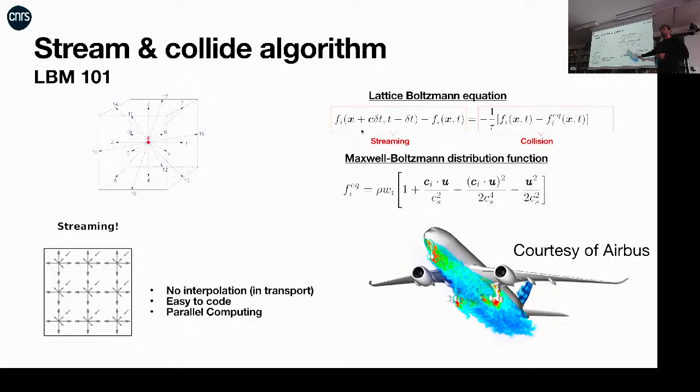So just to mention that when we write this, it looks like we're doing a first order Euler integration. So you can say that this is first order, but in reality what's hidden behind is a Crank-Nicolson scheme, so it's actually second order. The scheme is second order in space and time.

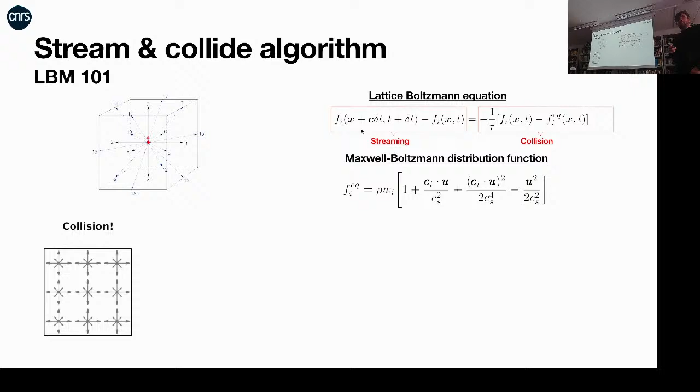Okay. So there is one problem with what I showed here, is that this works very well to solve isothermal flows, okay? And isothermal flows in which we assume P equal to rho Cs squared, so sound speed squared, okay? So this is the classical closure if you have constant temperature. But there is one problem with this framework that I'm describing, is that if we consider the energy equation, the energy equation should be order 2 here. So here should be order 3.

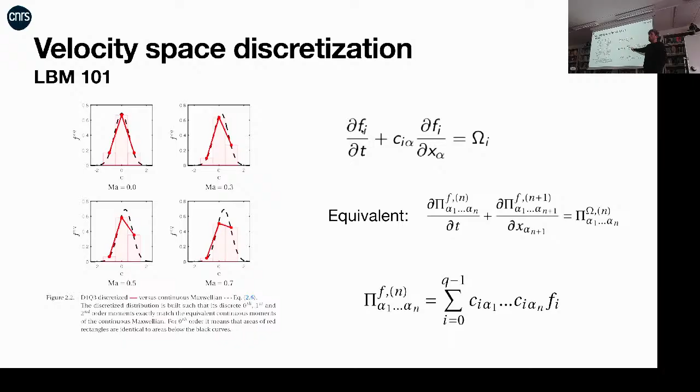And when we consider closest neighbor lattices like this, we always have plus or minus 1, basically. All of the velocities are plus minus 1 ordinates. And if you do that to the cube, you always get the same, plus or minus 1. This means that the third order, pi alpha alpha alpha, is equal to pi alpha, which means that your flux of energy is the same as the flux of mass, basically. It's linked. And so you see that you have a problem. That's why with the closest neighbor lattices, this kind of discretization, you cannot do compressible flows. You can only do weakly compressible, in the low Mach limit of isothermal flows.

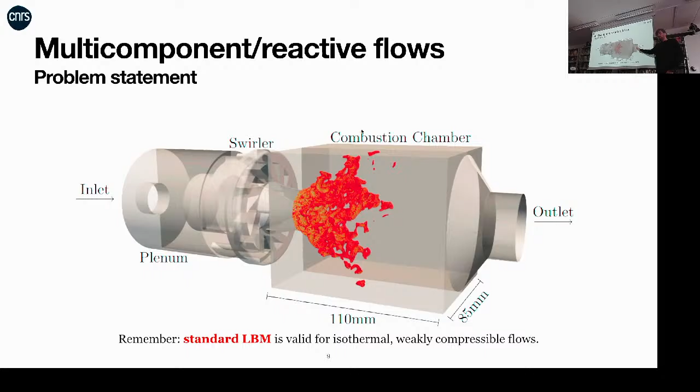Okay. So what I want to do, what I showed you on the first slide, is this. We cannot do this, obviously, with this equation. So I've shown you how to solve these two equations with the Lattice-Boltzmann method. And now we need to find a way to solve all of the other equations. And these are the classical combustion equations. So I'm not entering into detail, but basically we want arbitrary transport, arbitrary equation of state, arbitrary chemistry, arbitrary gamma, very importantly. In LBM, usually we have constant gamma, and so on.

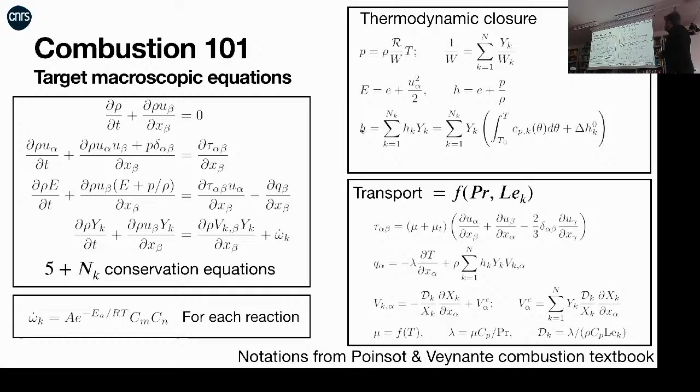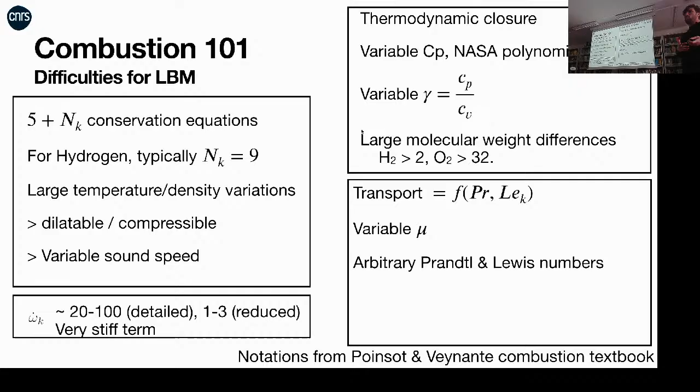So difficulties that will arise for LBM is that we have many more conservation equations. For hydrogen, for instance, we have usually 9 species. It's dilatable, compressible. And I didn't mention this, but we have variable gamma, whereas when we do the classical cascade of LBM, of the moments, we end up with a constant gamma, which is dependent on the dimension of the problem. So there are some fixes, but they're not so straightforward.

So how are we going to solve for energy and species? There are basically two main options. Here I'm going to start first with the energy equation, so the compressible part. I want to solve the compressible part, and then I'm going to deal with the species. So when we want to add the energy equation, the most straightforward way is to extend the basis of discrete velocities I discussed, to avoid having that pi alpha alpha alpha equal pi alpha.

So if we do that, we can develop what is called multi-speed Lattice-Boltzmann methods, and usually we end up with a quite large number of discrete velocities. And it has a number of problems, but especially it starts being quite expensive. So the gain that we usually have with LBM is not that clear anymore, because we're multiplying by 4 or 5 the memory that's required to do simulation, instead of 5 equations in the classical Navier-Stokes equations.

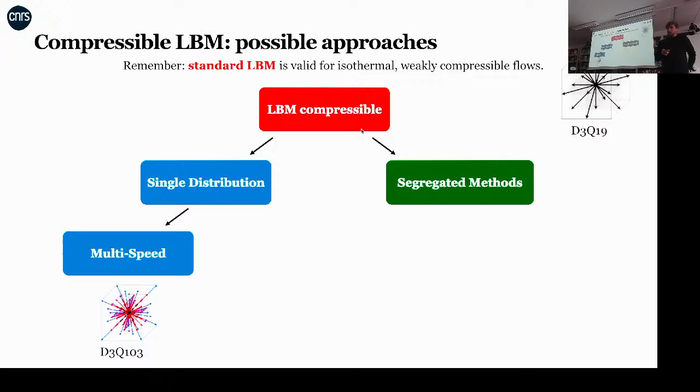Second idea is to do a segregated method. I think this was historically the first idea. People wanted to stay in the LBM framework, so they said, okay, I cannot get energy as the second order moment of my distribution function, so I'm going to introduce a new one, which is going to behave exactly in the same way as the first one. It's going to be solved with the same algorithm, but energy now is 0th order, and I'm going to couple the two, basically, okay?

This works. There are a number of papers, but it also gets quite expensive, especially if you want to consider n species, because then you need to have 19 for rho and rho u alpha, 19 for the energy, and 19 per species. It starts getting quite expensive. And when we think about it, the nice thing about LBM is that you can solve in the same equation the 0th order and first order, so mass and momentum equations.

But after the first order, what would be the next order equation for energy, at least at Navier-Stokes level, there's none. So the only thing we want from this is the 0th order. Sorry, it's the sum of all of these quantities, GIs, typically, okay? So if I just want the sum, then I can just solve for the sum, which is one scalar. So that's what I developed in my team. So this is a class of hybrid methods.

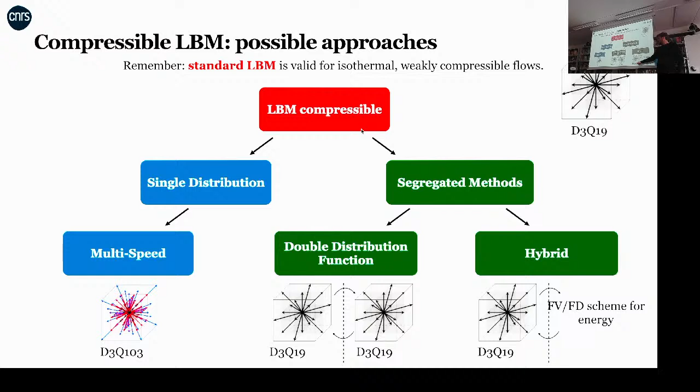And in that case, basically, we solve for 19 discrete velocities, 19 FIs, and we add to our vector of unknowns E, for instance, we're going to discuss which E, and the species. Okay, so we just add. So typically, if I want to do hydrogen combustion with 9 species, I need energy plus 9 species plus the 19, so I have 29 unknowns in total.

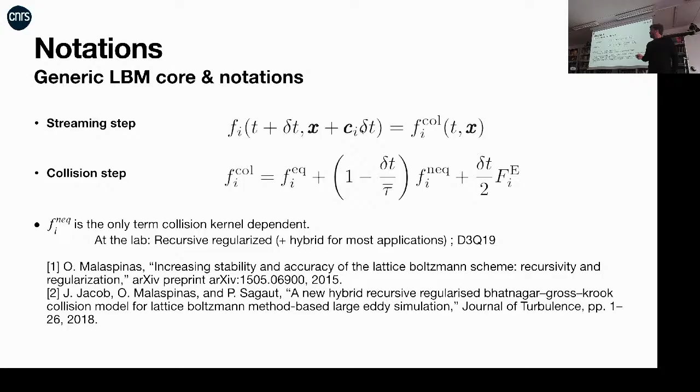Okay, so just a quick reminder of notations here. So we have a streaming step here in the LBM, which is streaming a colliding population, which can be written like this. So basically, this is an equilibrium. This is the Maxwell-Boltzmann function that we saw earlier. And this is an off-equilibrium part. This is nothing but F minus Feq. And this is if we have a forcing term. So we need to make some changes to get the dilatation right.

So the first thing that we did, the most important, is to introduce a parameter, theta, which is going to be some sort of reduced temperature, okay? So before we had P equal rho Cs squared, so theta equal 1, and now we want to have theta non-equal to 1. So this can also be seen as a ratio of sound speeds, typically. Or a ratio of temperature to a reference temperature. But this indicates this is my temperature variable, okay?

This is now projected on my polynomial, so order 0 is always rho. This is non-negotiable because this is my mass. Here order 1 is rho u alpha, and now order 2, here I used to have rho Cs squared. Now I do that times theta minus 1. So I get the right pressure into my momentum equation in the momentum flux.

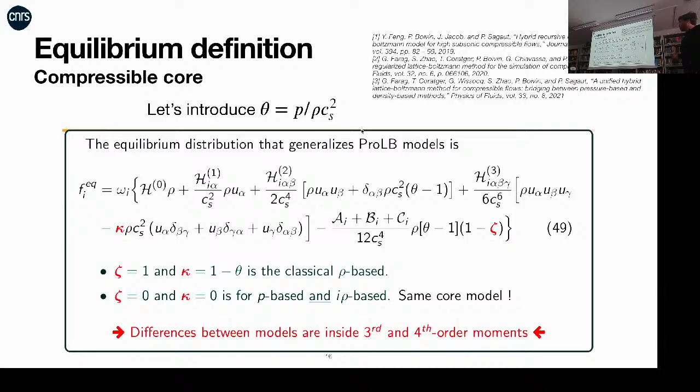And then we actually extended this to third and fourth order, okay? And I'm going to illustrate why this is important for compressible flows. So fourth order is the most important. Fourth order actually controls the isotropy of the dilatation, which we didn't have in the classical Lattice-Boltzmann method. Okay, so we showed this is a very simple test case.

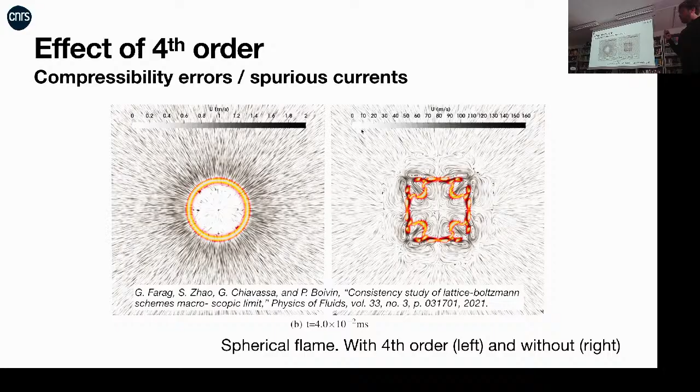So this is for the fourth order. The fourth order controls the isotropy of dilatation, again, that we didn't have in the original LBM. The third order is a bit more sensitive, but third order controls the isotropy, for instance, in a jet. Okay, so we're all talking about errors here.

I mean, every scheme, if I cut my F equilibrium to second order, I will be consistent to the Navier-Stokes equation. Okay, the problem here, what we're doing through third and fourth order, what you don't want is your error to be too different in the different directions, because after a long time, then you're in trouble. Okay, so this is what will give you spurious currents or this kind of behavior.

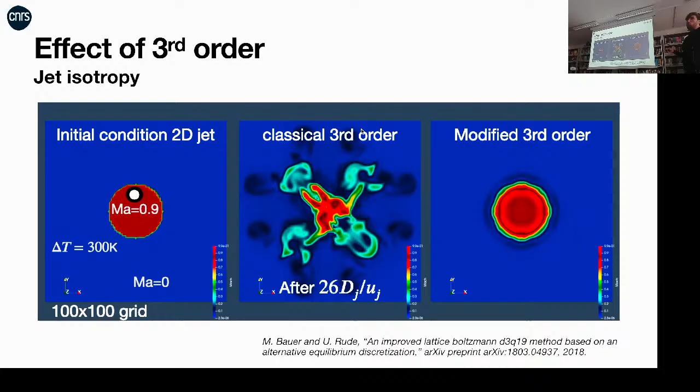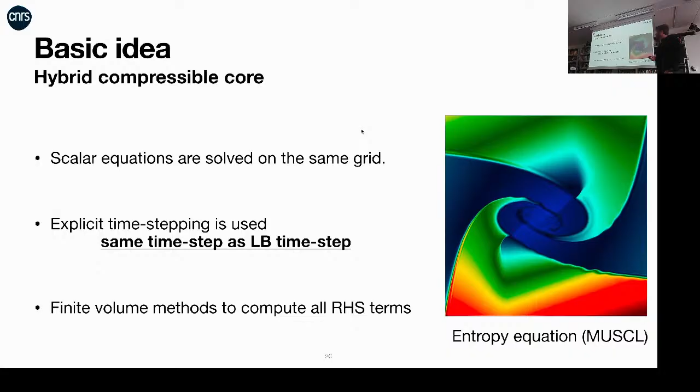So this is what we modified for the LBM part. Now I'm going to mention what we did for the species and for energy. So I'm going to accelerate a bit. Basically, what we want to do is that we know, at least I know, that LBM is very good at transporting vorticity and acoustics, especially acoustics, but vorticity on very few points also.

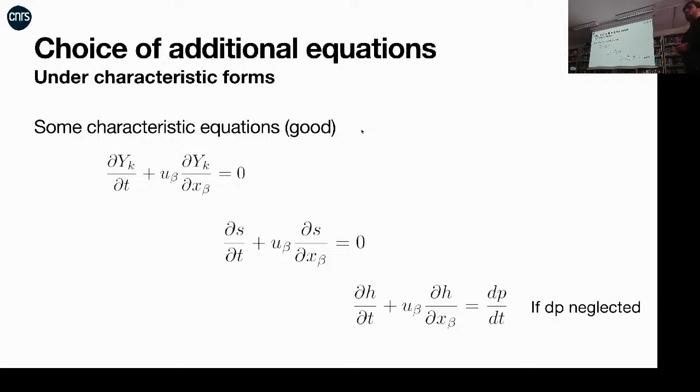Basically, when we solve this equation coupled with LBM, it's very easy because it doesn't act on the others. It's a weak coupling with the other modes, with acoustic and vorticity. So basically, it doesn't perturb the acoustic and vorticity. So to solve this, you can almost use any scheme you want. Let's say you can use a central scheme or anything you want. The best always is to use this kind of isotropic finite difference scheme, because then you're using all of your neighbors, the same as the LBM.

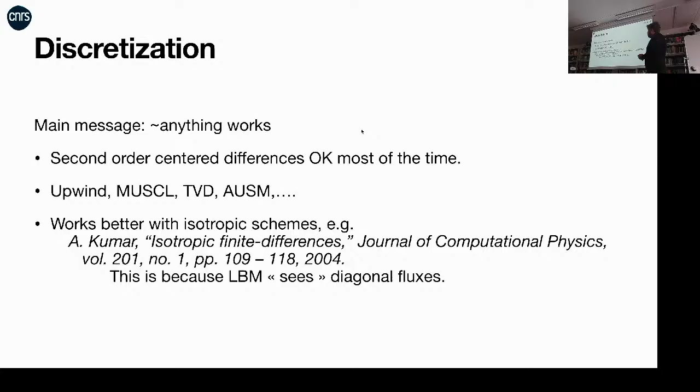Okay, so this is what we used to use at the beginning. This is very straightforward to do. As I said, it's just adding scalars. So we're solving on the same grid, same time step as LBM. So everything is mono, it's one block of code.

And then we developed new categories of schemes, also at the lab, based on early proposals here, which basically see on the lattice, when we exchange the data, what I send to the next point and what I receive from the next point is the mass flux, exactly. The mass flux computed by LBM.

So this is the mass flux, delta M, and I can reconstruct from that, if I multiply the mass flux by a species, whichever, I can take the value from the neighbor, my center value, anything. Basically, this is going to be the species mass flux. So we can reconstruct a lot of numerical schemes like this, which are going to be consistent with LBM.

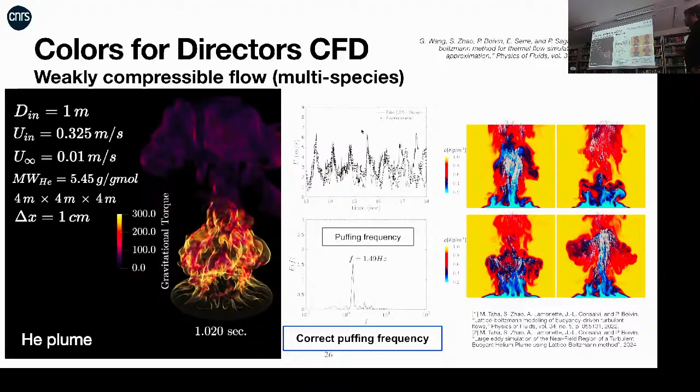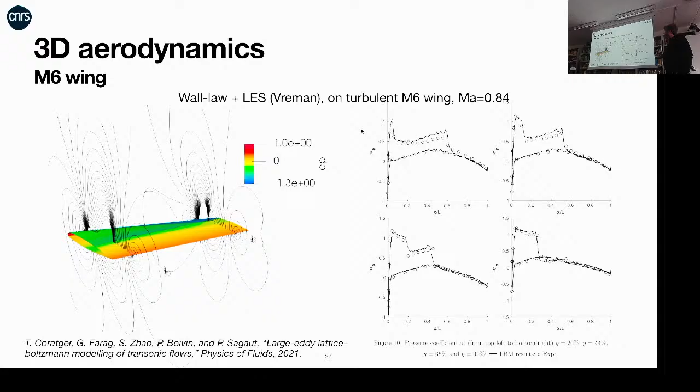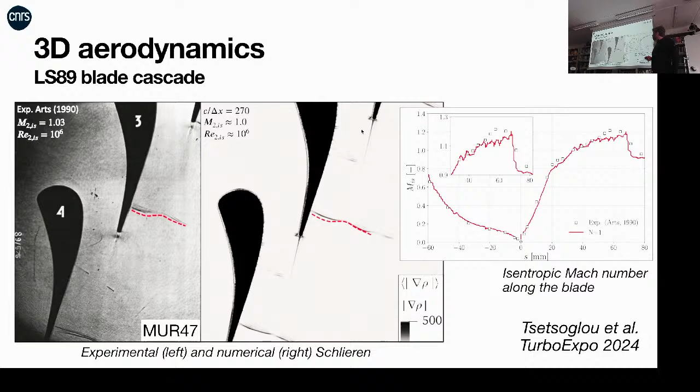This is a bit more recent, so we're considering a blade cascade, okay, LS89 for those who know. So this is a transonic configuration to mimic, say, what's in an aircraft engine. Okay.

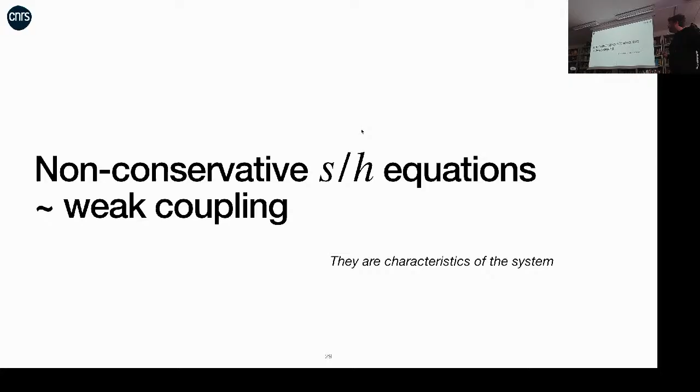So again, if I consider the equations for entropy, enthalpy, and so on, for energy and species under non-conservative form, the ones I showed, I have a weak coupling, and it's quite easy to couple it with the LBM. I don't get problems, okay, because they are characteristics. So this is nice, and you can do a number of simulations. But, there's always a but,

So the reason for that is that in any conserved equation, so if I want to solve, let's say, total energy, which is the right equation to solve to get the jump correct, or the same for the species in conservative form, if you expand your derivatives, you always end up with the mass equation, okay? That's how you get the non-conservative form. The mass equation has to be the same as the one that you're solving with the LBM.

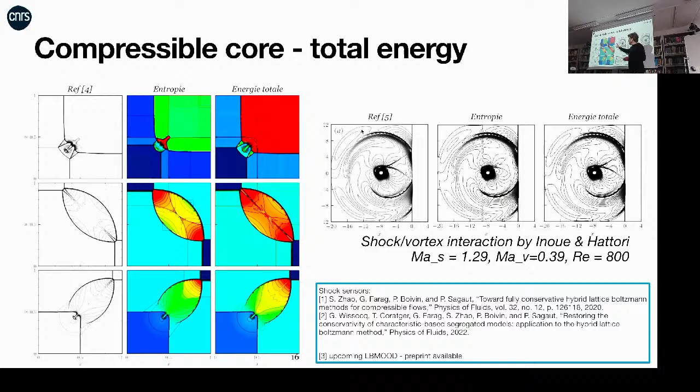Okay, so this is a number of examples. These are quite known. These are 2D Riemann problems. On the left is the reference. In the center is using the entropy equation. And you see that all of the results are wrong, basically, because the characteristics of the system are different. So we get very different results here. And when we solve for total energy, we finally get the right patterns. Okay.

So now I'm going to show some applications. Do you have maybe questions on the scheme that we're using? No more numerical schemes, promise.

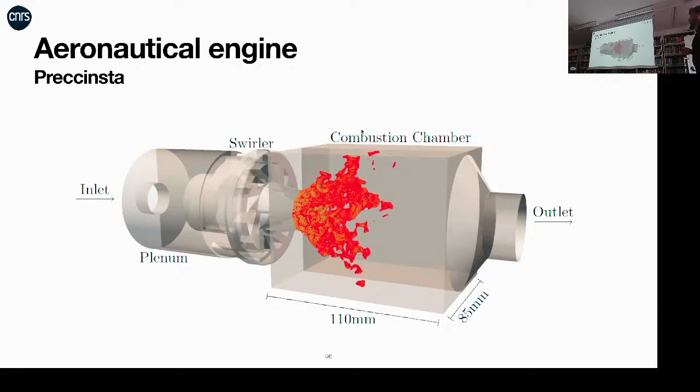So back to my problem statement. So this is a test case that we did a while ago, but now maybe it will make more sense with some examples of what the mesh looks like and so on. So I said the mesh is Cartesian. Of course, it's not Cartesian everywhere. If I want to do big industrial burners, it is Cartesian locally, but it's an octree mesh, okay?

So what happens is that you can define some mesh transitions, and so you can basically deal with any type of geometry like this. If you were careful, there's one thing that's not easy: here you are multiplying the delta x by 2, so you start seeing some filtering problems, but you're also multiplying the delta t by 2, because delta x over delta t is linked with my discrete velocity space, and this is constant everywhere.

Yes? So I have strong filtering problems here, which I could give another seminar on, but this is not something I'm going to discuss today. Okay, so you just need to be very careful here.

But the good thing about this, and this is what is going to save us for the industrial cases, is that this grid is going to be doing twice less iterations than this one, twice less than this one, etc. And so the numerical cost of one level of a grid is not linked to its size, but basically to the number of points that I have in that grid. And there's a 2 to the power n somewhere, because if I have only one very small grid point, it's going to cost me nothing because I'm not changing the time step elsewhere. So I'm doing a constant CFL-like calculation.

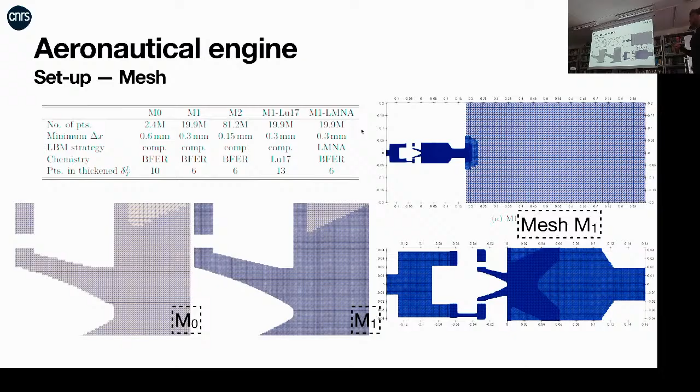This is magical for industrial burners, because you have a lot of geometrical details that you want to account for, typically small injection holes and so on. And you don't usually need many points to solve them, because you cannot afford it usually, but you don't want to change the delta t everywhere else in your chamber, which is 15 meters. So in that case, it solves naturally that problem. And that's why we can do this kind of simulation for a very reasonable cost. This is actually one of the main reasons.

Which, by the way, is not limited to LBM. You can also do that with octree Navier-Stokes. But the LBM algorithm itself is still faster, but where we gain most on industrial cases, I think, is for this reason.

Okay, so then I showed you the scheme. So the scheme, we also have mass, momentum, energy, classical. And the species and energy are written in a classical way. So basically, you can redevelop any type of boundary condition you like. For example, for combustion, we like non-reflecting boundary conditions, usually for acoustics, so you can do exactly the same. So everything else in terms of models is the same.

Source terms are going to be tackled in the same way as in a classical code. You just need to be careful because the time step is always the same, so you cannot negotiate with the time step. So typically the Fourier constraint, you need to make sure that it's satisfied on the side. Same for the chemical integration, unless you're doing implicit integration, for instance. But for Fourier, you need to check that the Fourier number is satisfied, because otherwise you're in trouble.

But it's quite easy. You can do it as post-processing, and you can restart your simulation changing the time step, for instance, basically rescaling everything.

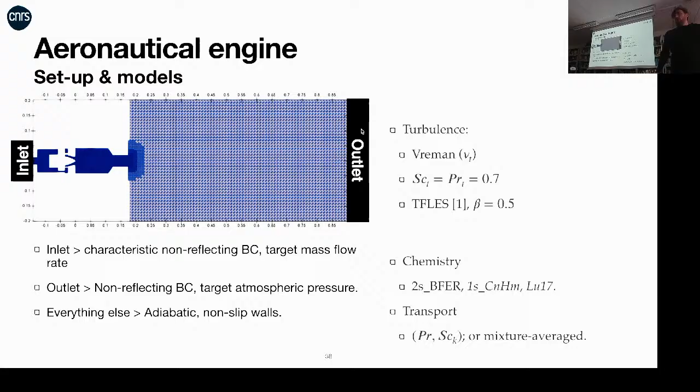So here we're using classical models. We're going to use a Vreman model for turbulence, sorry, turbulent Schmidt and Prandtl numbers, and a thickened flame model. We did that because a lot of people are using this model. Now we have a lot of other models. And you can use classical chemistry, so in that case, we're using two-step chemistry. And then you can do, same as usual, M0, M1, M2, some convergence study.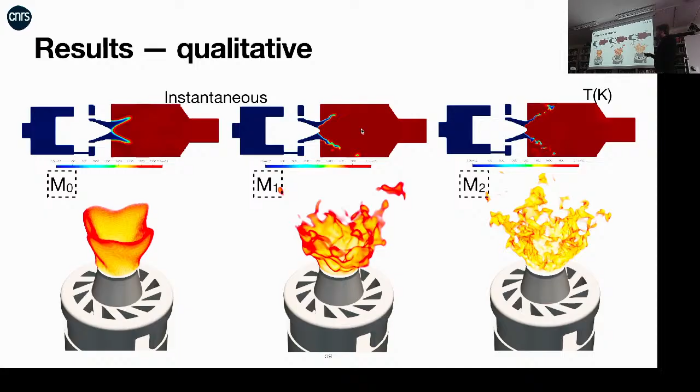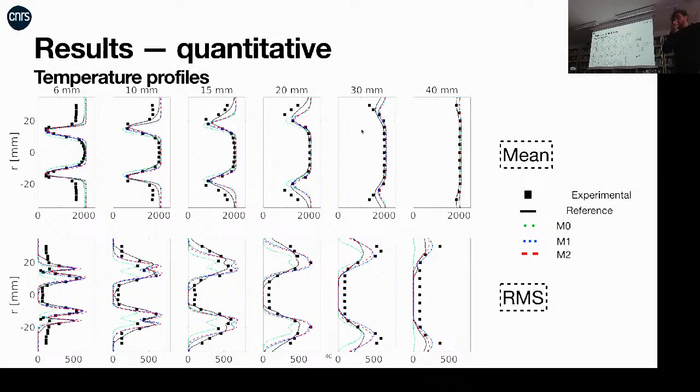And this is what the results look like. You can validate a good convergence between M1 and M2. This is temperature, mean and RMS, compared with experiments, and our reference in that case is a simulation from the team of Vincent Moureau. So we have good agreement. The only slight discrepancies are on the walls, but this is because back then we didn't have heat losses. So this was adiabatic versus heat loss simulation.

So I'm going to illustrate some more cases. So this is a case of detonation. It's exactly the same scheme. You can validate the ZND profile. What I want to show you here is the sensor, okay? Because there's nothing free. As in most other codes. We don't solve, let's say, a Riemann problem or anything.

So in that case, for now, and we're working on that, we need a sensor, and we add the viscosity in an LBM way, but we add viscosity in the shock. Okay, we're working on that. So far, we don't know how to do better, but we still get quite sharp profiles, and you see that we can get the right Chapman-Jouguet detonation velocities.

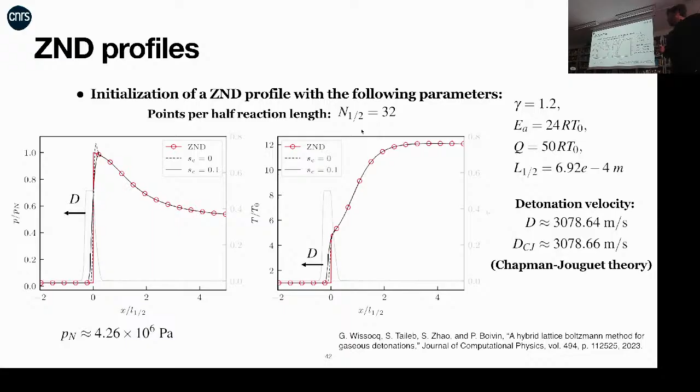I'm not going to detail this exactly because I'm running out of time. But basically, we extended this in 2D and now in 3D to do propagation of fronts. So these are two fronts of detonation, hydrogen. This is a fake chemistry, it's one-step chemistry. We're varying artificially the Zeldovich number to show the classical cell-like pattern.

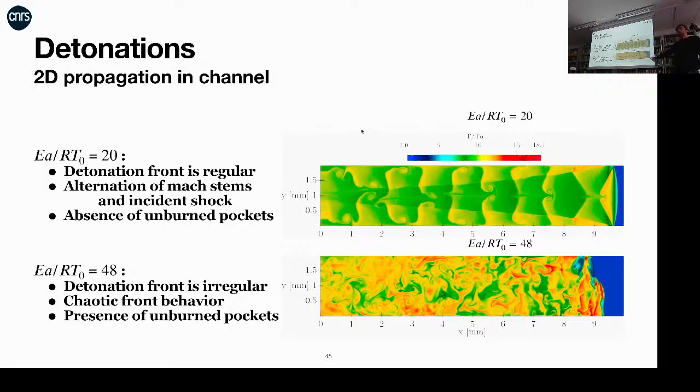I don't know if you all know this. The detonations leave patterns, soot patterns in front of them. For low activation, for low Zeldovich number, this is very regular. And for high Zeldovich number, this is highly irregular. The pictures we usually see in papers look like that. This is just the history of the position of these triple points. By the way, for hydrogen, varying the Zeldovich number is usually obtained by varying the dilution with argon.

Okay, I'm going to show a few more examples. I think I have 5 more minutes. So we're working in the chair in particular with our neighbors, a company called Fives Pillard, and they develop a number of big burners, not very sexy burners, for all sorts of applications, but they always need heat, basically. A lot of their clients are actually asking for developing hydrogen burners.

What they want is, of course, for the burner to be able to work fully hydrogen, but since they don't know how much hydrogen they're going to have, they also want it to work with fully natural gas, and sometimes with things even more dirty than natural gas. It's not easy to make a burner that functions both for 100% hydrogen and 100% natural gas. So this was the objective of a recent thesis.

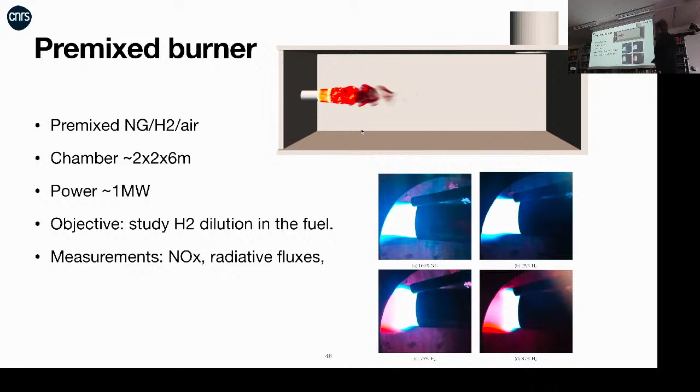Here you see that they have some experiments. It's something like this in terms of size, 25 centimeters, I think. The chamber is 2 by 2 by 6, so it's a small chamber for them, and 1 megawatt. They have some measurements, so we could compare the simulations with what they have. What they were wondering was the effect of H2 dilution on the flame length, on the NOx, and on radiation at the wall. This is something we do with Jean-Louis. I'm just illustrating because I'm getting to another burner, which is a bit more interesting.

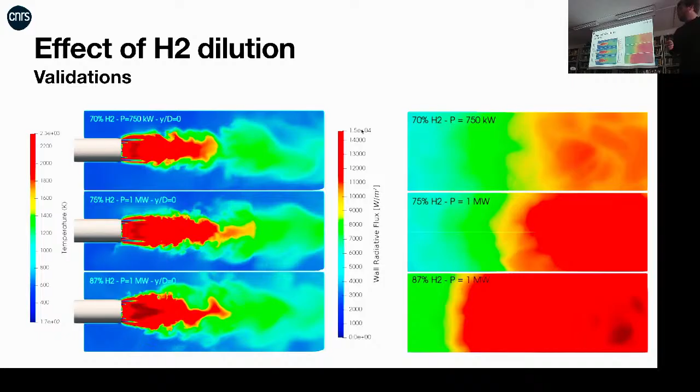These are some quantitative results. Because it's a big chamber, they don't have many experiments, okay? But they can compare temperature on the axis, which, to be fair, is okay. Especially, we're happy to have the right temperature at the outlet because it's mainly due to radiation. But we cannot be sure with this result to have exactly the right flame length. This is a bit better: the O2 profile on the longitudinal axis. And these are some results for NOx as a function of H2 dilution.

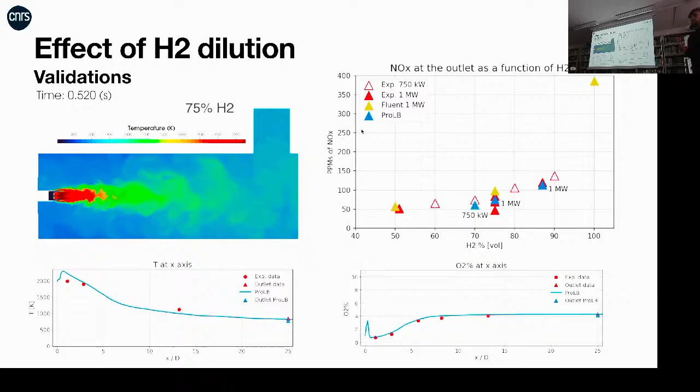By the way, this is getting back to combustion. When you increase H2, usually, if you're not careful, and now we know more or less how to do it, you increase NOx. So hydrogen is not that clean, because you get higher temperature.

Okay, the last case I wanted to show you was a nice challenge given to us by another company. Now it's a bigger burner, and they had some combustion instabilities. Combustion instabilities are a coupling between the acoustics in the chamber and the flame. Basically you can get some strong thermoacoustic instabilities, very well known for rockets. It destroyed a couple of rockets, but it can also destroy this kind of burner.

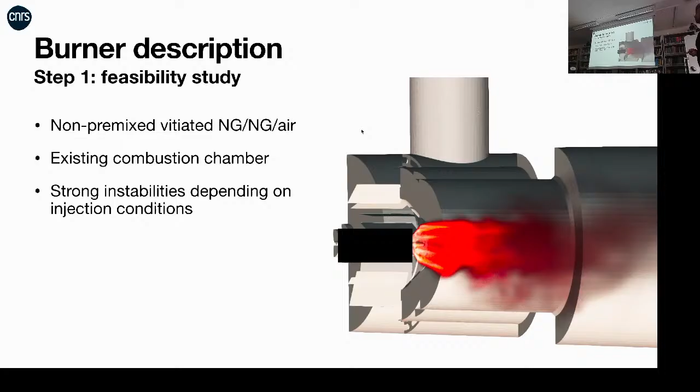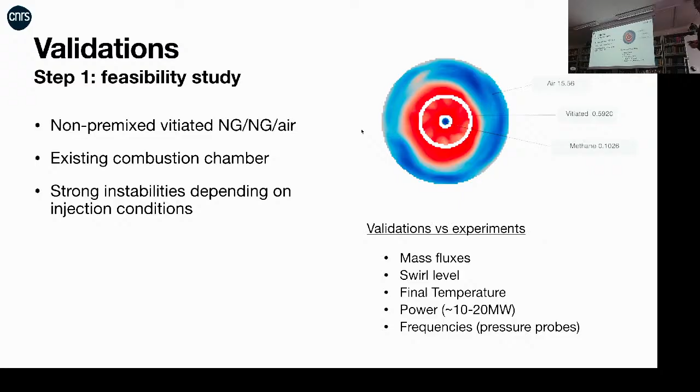And they basically destroyed this part of the burner. So they wondered if we could simulate this. So they gave us their cases with mass fluxes, so we could validate mass fluxes, swirl level, final temperature. So the power of this burner is close to 20 megawatts. And they also had pressure probes for frequencies.

And if we look a bit further, for the stable case, this is the variation of heat release rate integrated in the chamber. So you see that it's quite quiet for the quiet case. And for the unstable case, we observe variation of order 30% of total heat release rate. So remember, this is a 20 megawatt burner, 20 meters. So you get a lot of vibrations from that.

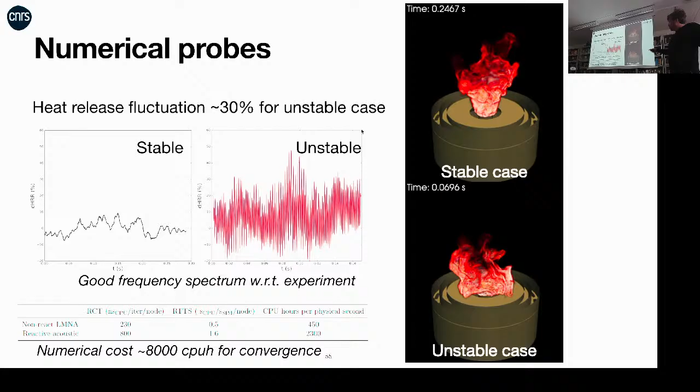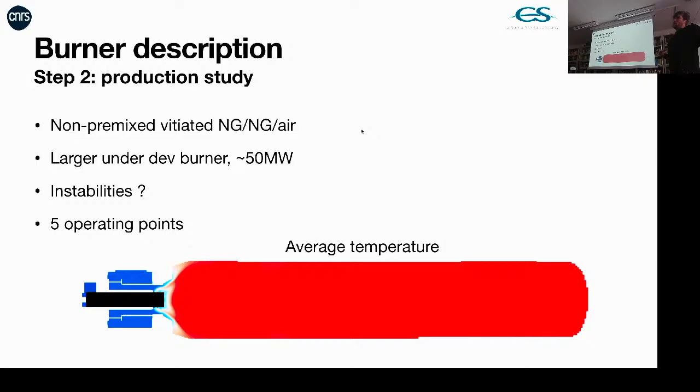And at a very minimal cost. Okay, so this simulation costs about 8,000 CPU hours. So we can look also at the flames. And they came back because they were happy with the results, and they were a bit afraid because they were developing an even larger burner, so 50 megawatts, and now it's 20 meters. And they wanted to test beforehand if it would be stable or not. So this is what the flame looked like.